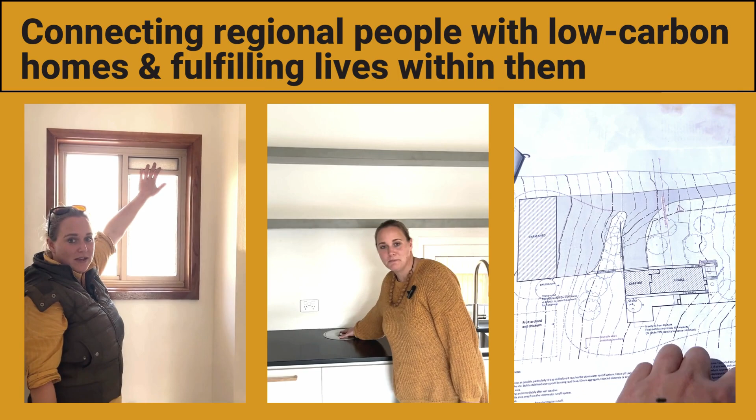This series is all about my own farmhouse build, the Cooee House. I know the main thing everyone who's here is wondering is, what does your house design look like, Sarah? What does an architect design for themselves? Well, I hope it's not disappointing because it's really very, very simple.

It is correct for our context, but our whole ethos at Cooee and my practice in architecture is to distill things so they're done beautifully and simply and optimized well. Glenn Murcutt has this saying, he says all the time, to be simple is not to be simplistic, meaning that it's actually really challenging to do a simple thing in a very distilled, beautiful, effective way.

So that's somewhat what we took on. There have been many variations of what this house might have looked like over the years. I think there have been probably 4 really significant variations. The very first one I drew up as a graduate had sort of 2 different wings and a cross point, and then I learned about not only the thermal efficiency but cost effectiveness of not having lots of external wall.

And then there was another version that was 2 stories, and we sort of had a second story within the roof space, like a sort of attic loft space. You can see that model on our Hackett house with Cooee. We experimented more with that. It made more sense in that setting.

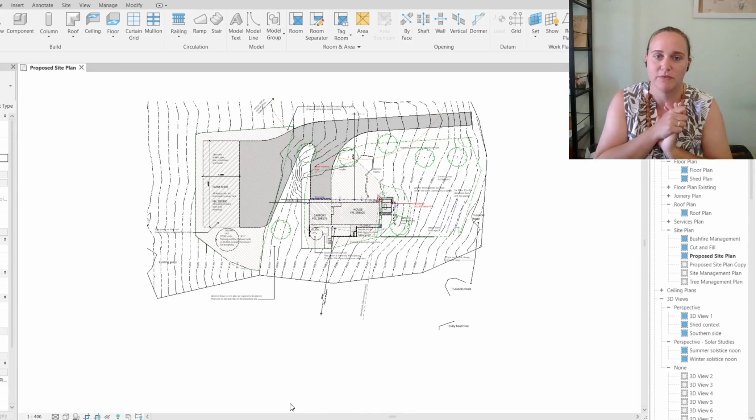But then we do have this very large farm shed. Our farm's in need of a new machinery shed and whatnot, and it's also a workshop for my husband, so you can see that it dwarfs the house by comparison, just purely because of its size. It's then turned to match the fall of the site, so it's not a massive cut in, which works really well for protecting it, and it's just got that eastern opening.

The site falls down this way. So while we come in on level at the carport, and then there's a flat area to the north of the house, the site then does drop away, and there's some interesting things happening with how we're going to do the garden around there. Let's jump into the floor plan.

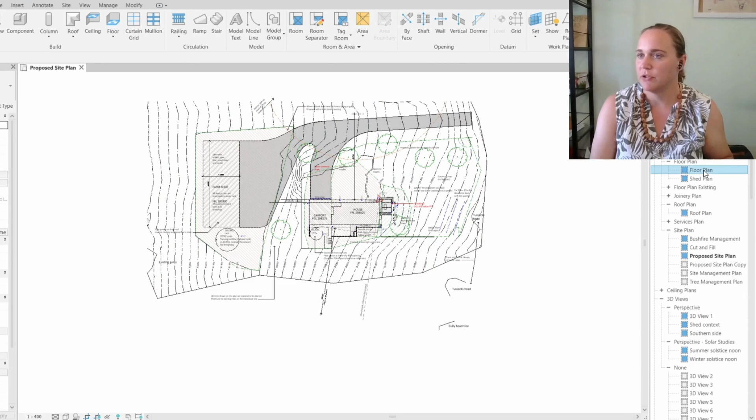First of all, let me just run through the size of this house. So we are 176 meters squared. Now, I wouldn't say that is a small house, that's a pretty typical family size house for what we do. Your average new Australian home is a bit bigger than that, more like 200 plus a 40 square meter garage. But for what we fit in this house, it is

very space efficient. Considering that it can function as a 4-bedroom, 2 living, 2-bathroom home, that would normally be an almost 300 square meter house, I reckon, if you look at some project homes, whereas we're doing it in that 170 something. So let me walk you through. Remembering our north is up to the front here. So how do you optimize having good living area and windows on the north to capture all that winter heat, but then also enjoy those views that are down around the south and sweeping around the southeast?

So we come into our carport here. It's an open carport, and I'm a massive fan of open carports. Not only are they cheaper to construct, but you keep them clean. As soon as you put a garage on a carport, people just fill it with stuff and then they park outside.

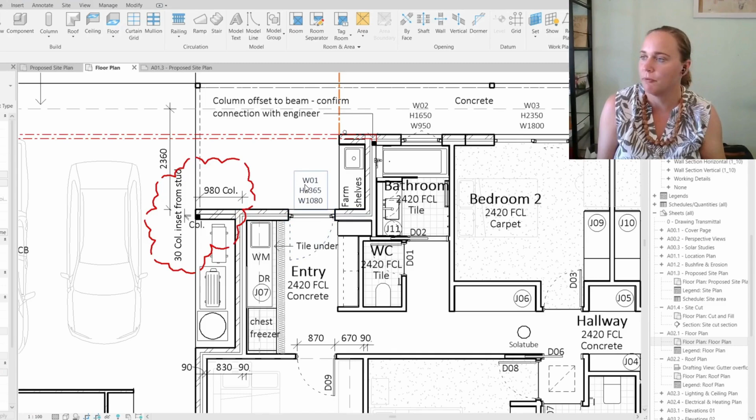And then this space at the back, it's really a room of requirement. So to start with it's intended as my office and workplace, and also my husband's office for the farm desk, both being self-employed. But it is sized to have the sofa bed in it as well, so if guests come it will be the spare guest room.

This starts off as a window, but it can be sort of put a new door handle on it, and it can be a door, so that you could even potentially have someone else staying there as a bed sit. So say a teenager ends up living at home and they want their own sort of different space again, you could use that for that.

No built-in joinery in here yet, because that's another budget saving again. But you can see that door's spaced over for sort of an area here and an area here, and then a sitting area here.

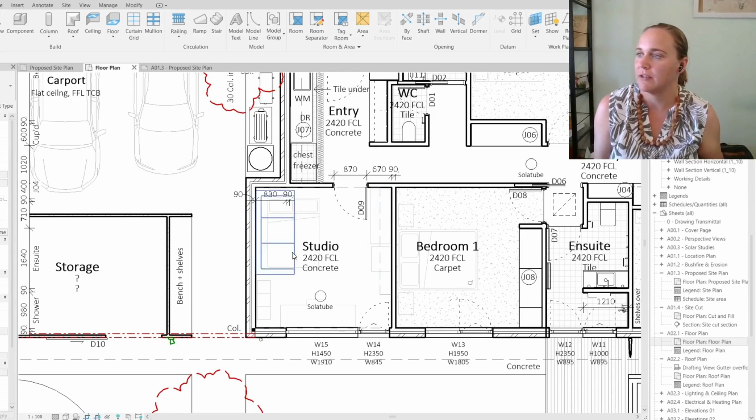We then have the 3 dedicated bedrooms. So the 2 kids get the nice northern bedrooms. Kids tend to spend a bit more time in their bedrooms, and it's set up here with a desk space right next to the window, so that is a nice space for them to be in. They'll be getting that warm winter northern sunlight.

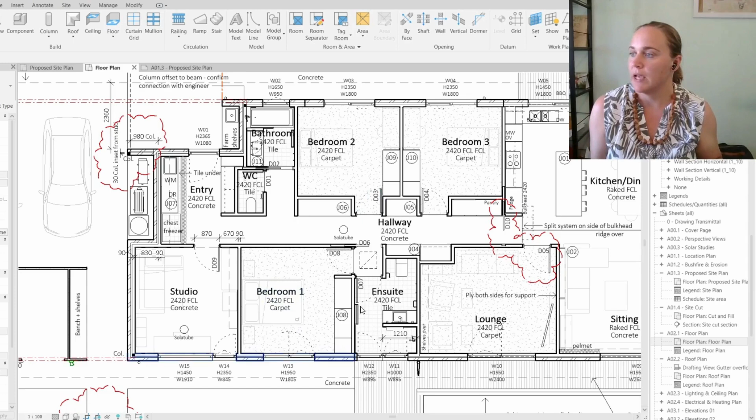And this is sort of a classic farmhouse thing - they've got their door straight outside, their built-in storage along there, whereas our bedroom is down here. Some people really like an eastern bedroom where the sun's going to wake them up or things like that. That's not something we particularly like.

For me, it was the view. So that bedroom will be on the southern cool side, but we'll have that view down the valley and to the snowy mountains.

Now this bathroom's quite a small setup by new home standards, but like all things, far more effective and spacious than a lot of the homes we rent in over our lifetime. So we do have the separate toilet, and then this bathroom is a pretty generous vanity, so room for everyone, and then a big built-in mirror cabinet.

So that'll be sort of the family health hub. And then it does have a shower over bath - we'll be using a specific bath that's designed for that so that it's not a nightmare. Because then we have this, we call it the off-suite setup. We very rarely do en-suites these days that are true en-suites that are accessed from inside a bedroom.

We tend to do more off-suites because you can close this door and it will work just like a traditional en-suite. But if you've got heaps of families staying over, or someone's in here, you can also close this door and it'll be used as a secondary bathroom, which makes your home so much more agile. And I'm really looking forward to this.

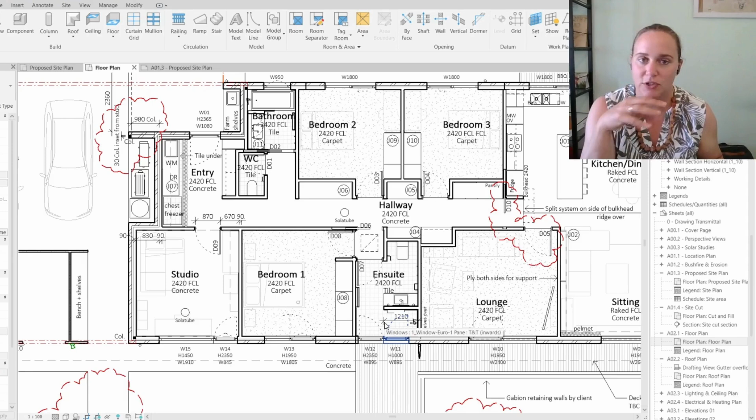This is also the one designed with the light touch accessibility. So not fully wheelchair accessible, but it is designed to the livable housing standards, with space in front of the toilet, and railing can go either side of the toilet. Same at the shower—we can put railing all around and you've got that completely flush entry into the shower. So we don't mind having the shower over the bath in here because we do have a completely safe walk-in shower. If an elderly relative comes to stay, for example, we would get them to use this bathroom.

Lots of storage all the way down the hallway. So our bedroom, for example, the plan is that this double door cupboard is mine.

Some people might say that's not enough storage. I have two theories. One, you will fill whatever space you have, so if you don't want to be overwhelmed by a lot of stuff, don't make massive wardrobes for it. But secondly, a well-designed wardrobe is so much more effective than the really cheap default ones that you get. So this will have drawers lower and then upper hanging.

My partner has this same setup here, and then there's some hanging here, but this is also designed as wardrobe hanging. That's how we've lived in every other house that we've had because we've never had much bedroom storage. And this is where suits, dresses, coats, things that don't get used that much go.

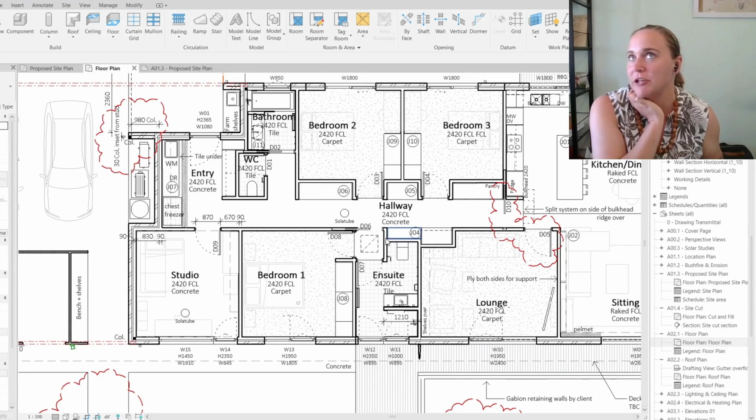This shallower cupboard for games, things like that. And then along here, we've got plenty of room for linen, sports gear, things like that.

Then we come around to our living space. So the living space was always the thing I struggled with the most, because how do you get the most out of that northern sunlight coming in when the best view is south?

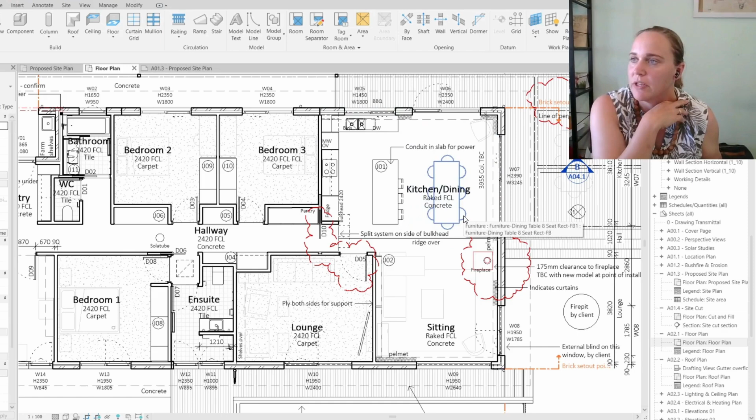So this is our open plan layout. You've got the sink facing north and a somewhat typical L-shaped kitchen with a long island, and then our dining space on the northeast there, which will connect both this way and this way.

So when our guests come to visit, they can either come through the door here or they can just walk right along and come in this door here. You can get a swing glass door like this because I've lived in a lot of houses with sliding front doors and they're just a nightmare.

And then we've got our big lift and slide slider over here. So this will open right up out to the deck area here, and then you step down to a fire pit area down here. This is our fireplace here.

And then this is the screenless sitting area. So it's got the piano and bookshelves and things. And even though our view is sort of out to the corner here, that's captured with this corner window.

I can't wait to show you this, because a lot of clients will immediately think to enjoy a corner view, you have to have a very fancy corner window where the glass meets. But it's a lot cheaper if you've got at least a column in the corner, so you don't need that structural cantilever of roof over. And then I've even got ours pushed out a little bit because I know that the sense of the corner expanse is more important than having that necessarily connect.

And then this is our true lounge with the television in it, with its southern view. Again, it's able to be closed off so that it can be a guest space. I imagine if we have a lot of family over, kids might sleep in here or something, or you can close it off while the kids are watching a movie and adults are hanging out here.

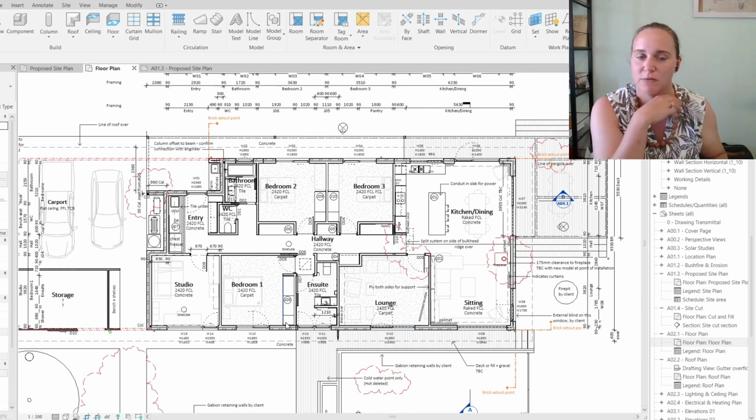What else? Again, we're going curtains mostly all the way through. There's actually a built-in pelmet that runs around this raked space to hold the curtains. Curtains are great thermally, I think they bring a softness. We're moving away a little bit from the up-down blinds on the tilt and turn windows, which are also thermally efficient, but I like the softness of the curtains. And then the curtains in these other spaces will just have the simple ceiling mount tracks, so they're floor to ceiling fabric, which looks really nice and is quite affordable, and you can install it yourself.

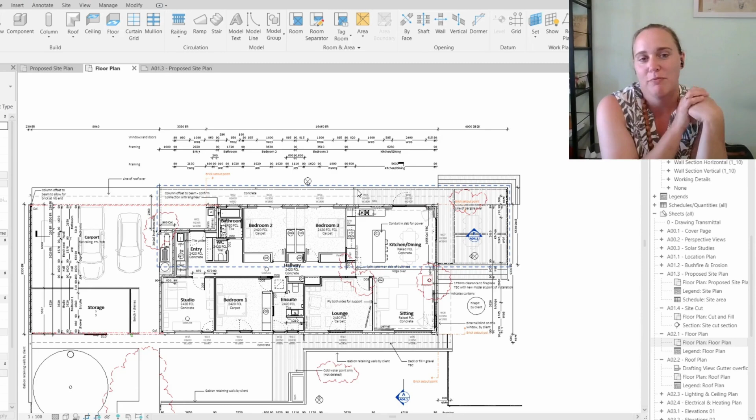We have an eave all the way around, so I'll show you that shortly. The home is automatically shaded in summer, whereas the sun comes in in winter. But then we extend that effect by having this frame around for the pergola. To the east and to the north, there will be a wisteria along here. I know a lot of people say don't do a wisteria, but this is a steel structure designed to withhold the fury of a wisteria and set off the eave of the roof so that we can just zoom along with a little electric cutter and keep that wisteria at bay. But that will have a beautiful effect of extending that northern eave and creating more shade along there in summer, giving that transpirational cooling and a nice greenery along the front of the house.

There's so many project home plans that get the design right in that the living area faces north, but then they put an alfresco outside and it just kills how it's all working. You're then instantly blocking all of that winter sun coming in and that free heating during winter - not to mention just light, it makes it very dark in winter if you do that. So when we've got homes with east or west views, we generally stack the living areas on the north side of that view and then extend this area out, and this portion will have a roofed cover over it, which does give you that roofed outdoor area if you need it.

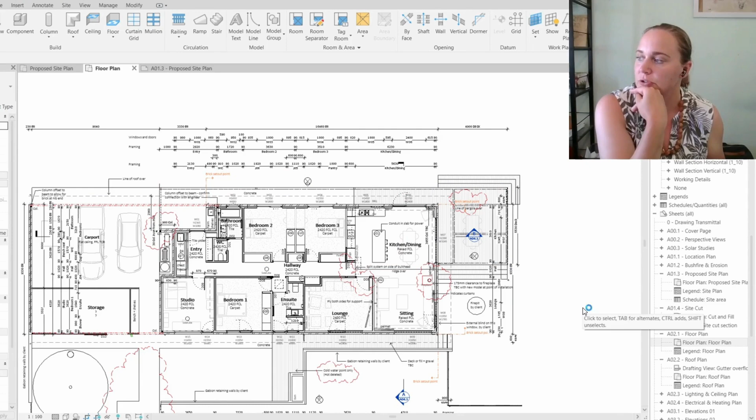Connecting directly to there. Let me show you what happens in 3D. Maybe I'll show you solar studies first. So this shows the effect of that summer and winter solstice. This is in the middle of winter at midday - you can see that the sun is hitting all of these windows and flooding in.

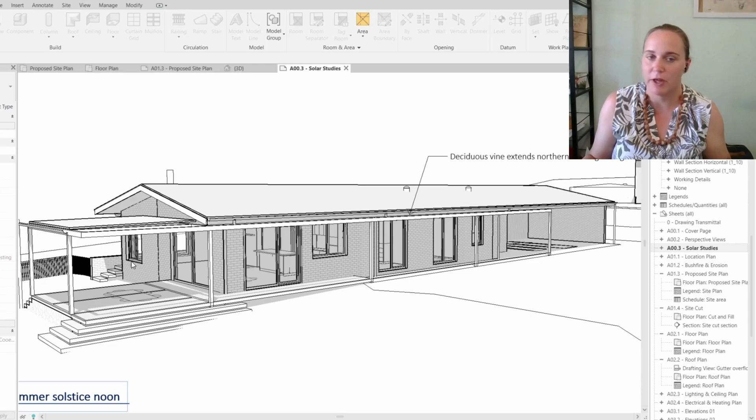Whereas in summer, you've got that eave working for you and there's not sun hitting any windows. The sun will hit this window, which we will have an external shade cover over, and there are no western windows. So that gives you an idea then there as well of the form.

So it's a very simple gable. We did originally have an expressed fireplace on the edge here, which looked great, but it was only really aesthetic - it's not needed these days with the flue. So that did come off when we were hitting a little bit over budget.

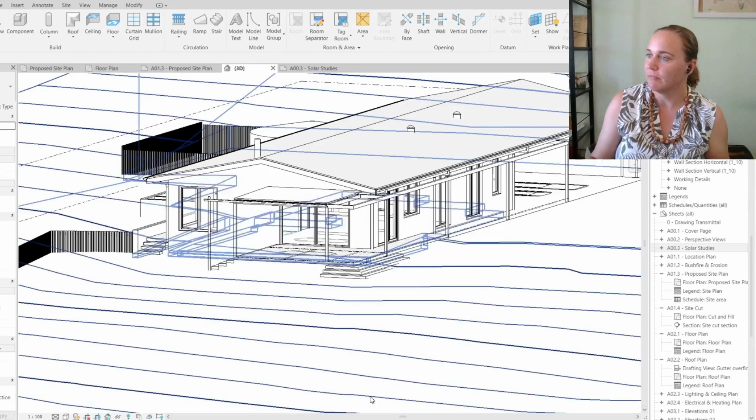This is that pergola that you can see running right along there, where the wisteria will grow along. So you can imagine beautiful vines all along there, changing with the seasons. And then that integrates into some structure that's needed for the carport there.

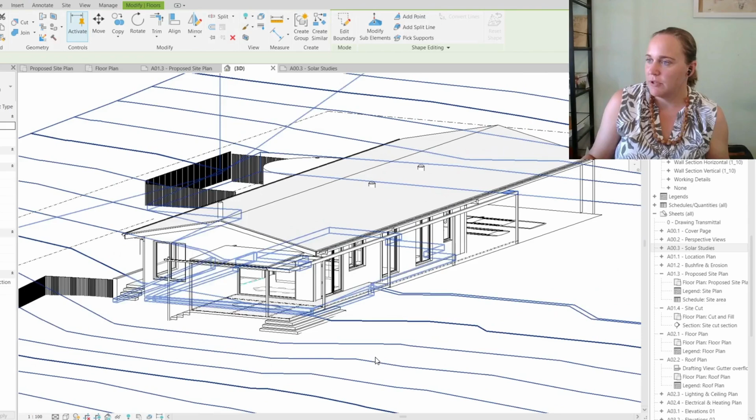What materials are we using is usually the next question. Look, there is no perfect material. Any material you'll throw at me, I could make an argument for why it was sustainable, and likewise, any material you can make an argument for why it is not sustainable. I want to do a whole other video about that sometime. But I guess for us, we want this home to be very robust and last many generations, being on a farm. So we have gone with a masonry finish so that we don't have any need to repaint or redo flashings and things over time.

And that's not what we do on all of our projects, I have to say - we do a lot of lightweight clad homes. But we did end up going with brick. The problem with traditional brick is it's fairly carbon intensive, so we're getting a recycled brick mix from a supplier in Sydney, and they sort their bricks really well so you can pick a mix that you like.

Ours is a bit more softer and varied than, say, you see a lot of Canberra red brick, which is a really rich red brick. So it's going to be softer.

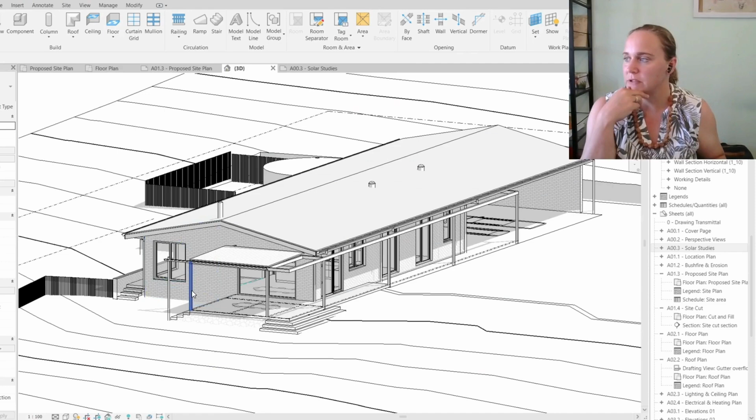Then we've got black detailing. That's partly driven by a look that my husband likes. So the windows and the framing and the gutter and fascia are all black for that detailing. It's almost like the seams on your coat.

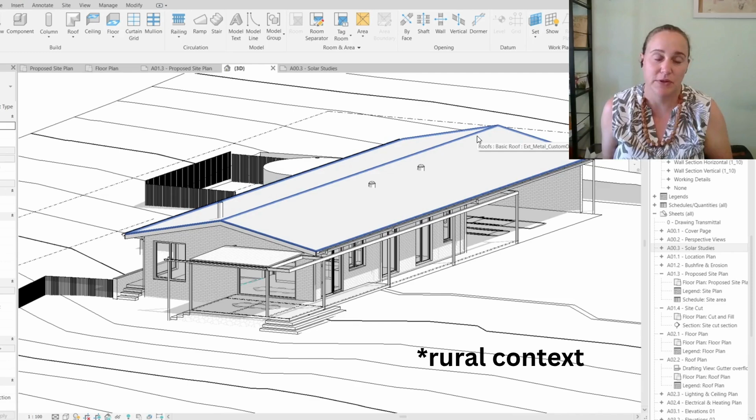And then the roof is a more subdued woodland grey. It fits really well in rural context because it has a sort of greeny browny undertone to it. It's not as harsh as those black roofs.

If you're thinking you're doing an energy efficient house with a black roof, Sarah, if you look at the energy efficiency modelling, because we use so much more energy in winter, having a dark roof actually has a marginal positive effect. But if you've watched the other video on our channel about optimizing a home, when we model the different colours, the way we build houses, when a house is well built, well detailed, well insulated, the colour of the roof might make maximum 0.1 star of a difference in the rating, and actually it's usually skewed towards winter.

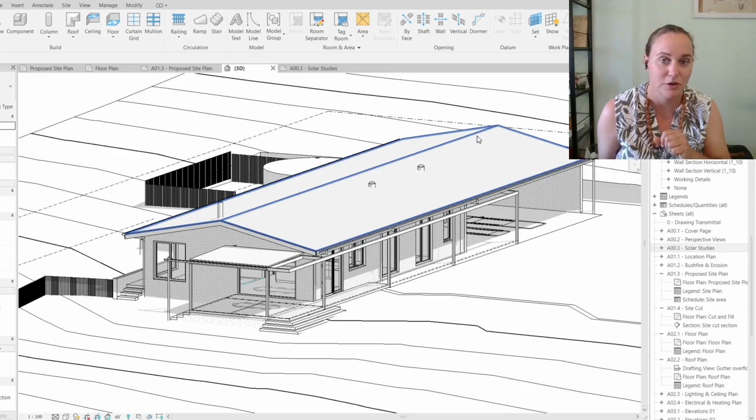Now, different story in the suburbs. Black roofs do contribute massively to urban heat island effect, and I am more passionate about dealing with that.

And then around the back, you can see we've got that slight drop off. Now, I'm not sure whether we'll really achieve this. You have to be flexible as your project goes along.

The dream is to have the paddock come right up to the end of the house, so that if you're standing up here in the lounge room, you look out and you don't really see garden and fence. You just see paddock with horses and cattle and trees and the snowy mountains in the background.

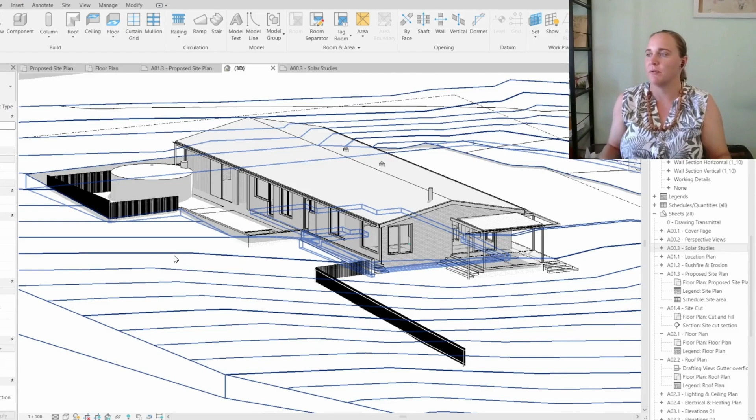So we might do that with a false fence or a ha-ha wall, if you've heard of them, where you dig it a bit lower so the fence is high enough for the animals on one side, but then it doesn't feel as high for you on the other side. We'll see whether we can achieve that or not.

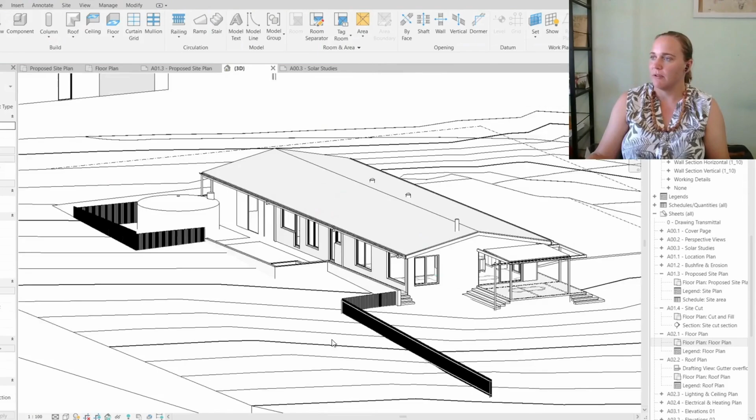And then this is an outdoor bath. I forgot to point that out in the plan. So there's a door in our shower that comes straight out to an outdoor wood fire heated bath that will go out here and look out to that view. That's a big dream of mine.

What else do you need to know? We'll just run through those elevations so you can see.

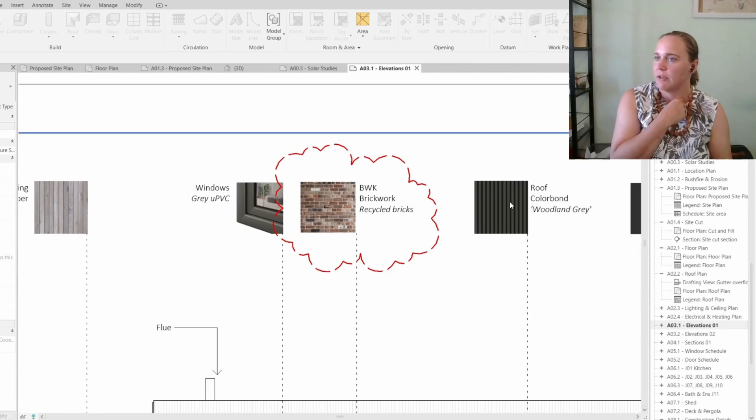Here's our recycled brick sort of palette with the darker colours. We've got the grade off timber decking, ironbark, which stays, it's hard to install, but it's a very hard, solid, stable timber. So you just let it grey off. You don't have to maintain it and it doesn't splinter. It's also accepted in BAL 29 because it is such a dense timber.

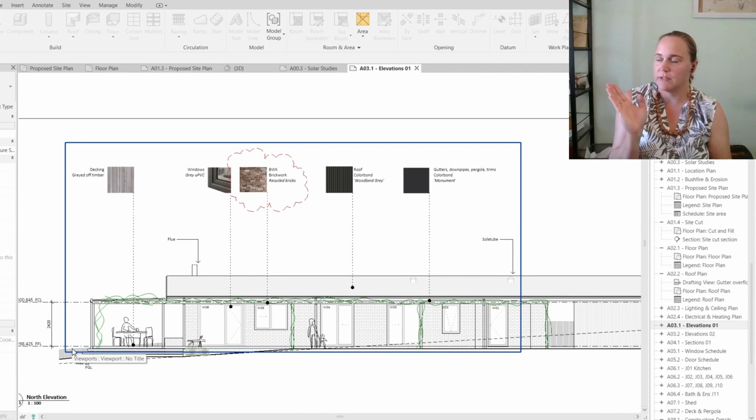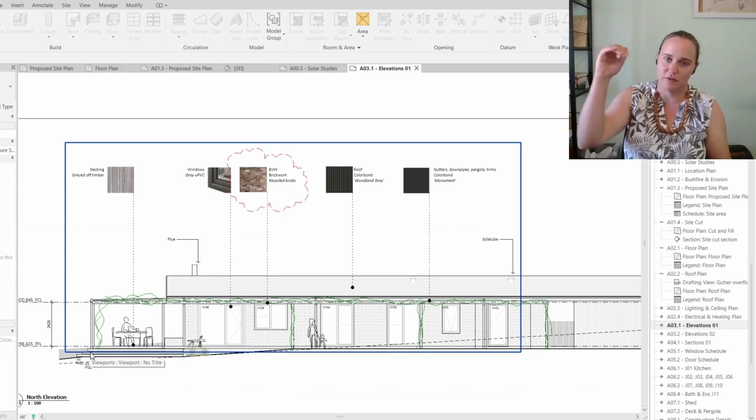We will enclose all the subfloor, and actually it's the only part of the house where you do leave a little gap. You don't ember-proof the gap. The bare theory is that if an ember lands, it would actually fall through, because you do need a gap for decks to expand and contract. So how do you ember-proof it tightly? You can't do that. So then leave a bit more of a gap so it goes through. Supposedly, we will be putting gravel underneath the deck so that if that were ever to occur, the ember wouldn't fall through into something underneath.

Now, vines, you're not really meant to have them in bushfire areas, and depending on your jurisdiction, you may have conditions that stipulate that you won't do a vine. However, my own research on this seems to have come to the conclusion that they've made those rules around spaced out greenery and vines because they have to assume the worst case scenario: the bushfire is happening on a drought year, people haven't maintained or watered their plants, so they become a hazard. Whereas well-watered plants, particular plants that aren't oily, don't have volatile oils, don't have shredding bark, have nice big waxy leaves, can actually be defensive in a bushfire scenario. So wisteria is one of those plants.